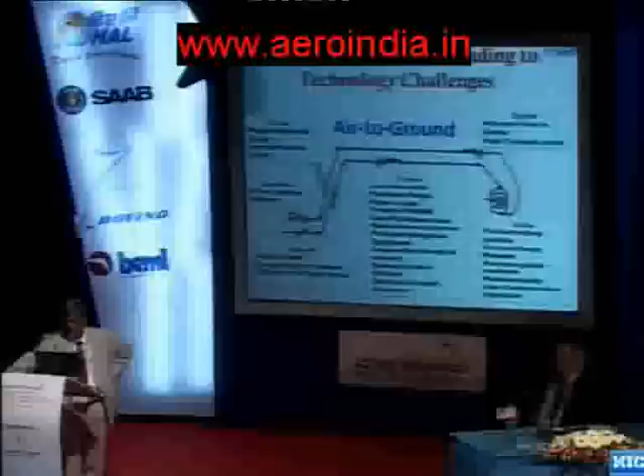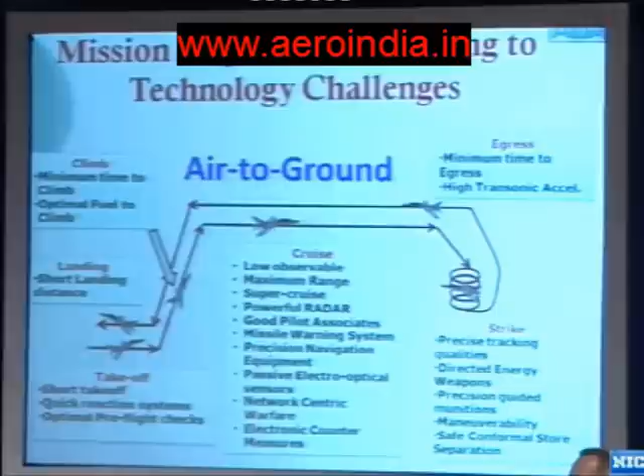The quick reaction system is an evolving requirement. Every time we are told to see that the aircraft can get airborne after a command within the shortest time, that demands technologies. And the user would like to have pre-flight checks done - absolutely nothing undetected, nothing spurious told. So that's how the demand comes to the designer.

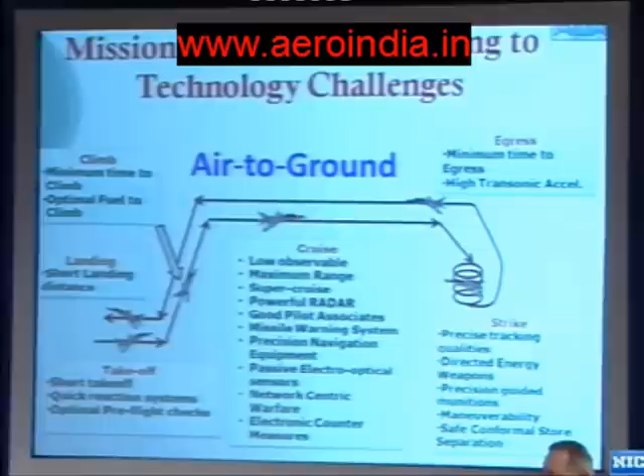Then the next phase is the climb. The requirements could be a minimum time to climb to a particular altitude, or sometimes optimal fuel to climb there. All these things lead into design and technology challenges.

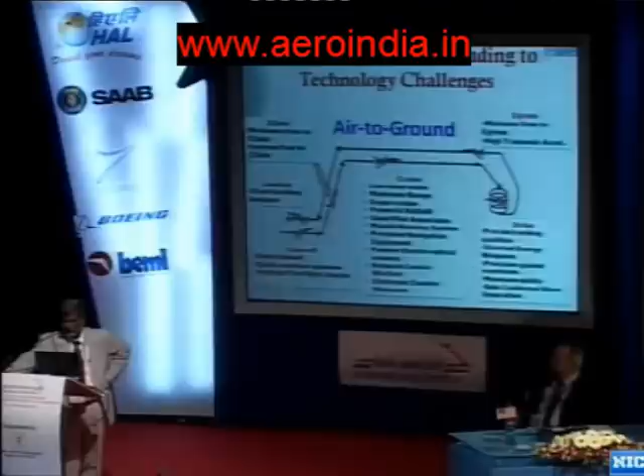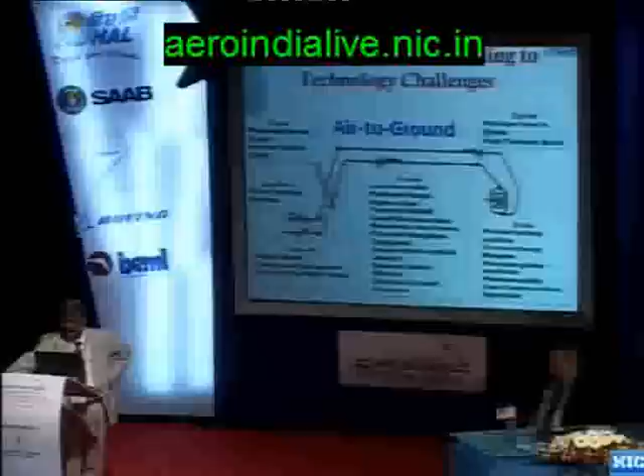Then comes the mission segment - cruise, in the case of a strike aircraft. Each of these bullets is really a challenge to the designer, and this is where continuous evolution of future technologies is going on. Low observability, maximization of range, and super cruise - flying the aircraft at supersonic speeds without the afterburner on - is a requirement from the consideration of low observability and mission performance.

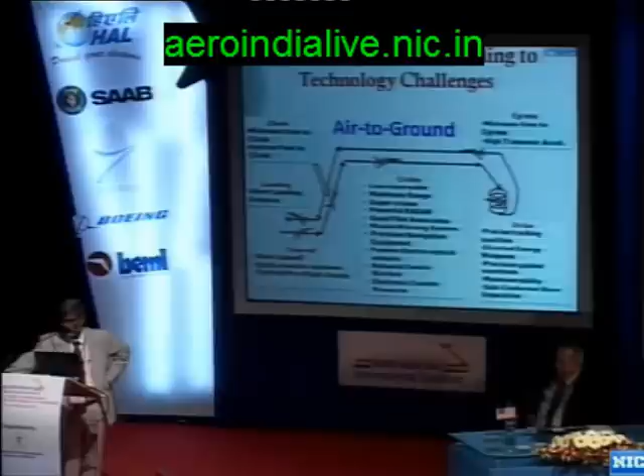And a powerful radar - maybe AESA or future versions with different apertures all around the aircraft, still getting the signal. A good pilot associate, related to artificial intelligence, where the pilot's workload is reduced. Missile warning systems, precision navigation, and so on - the list goes on. I won't get into the details, but I'm just indicating how these demands come to the designer to design the aircraft with all these things.

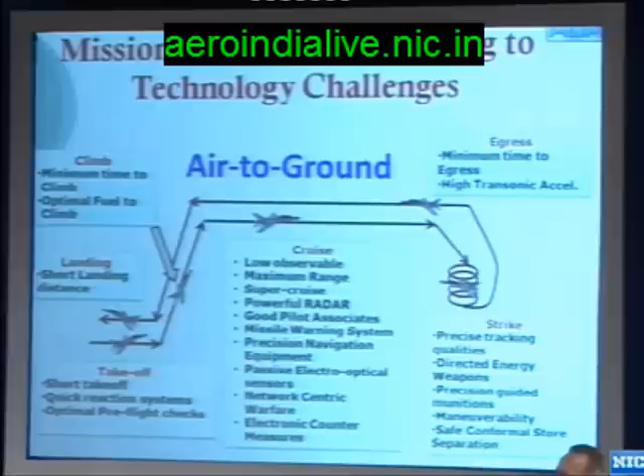Unfortunately, down the line, we'll see all of these are not coaxial - they are sometimes antagonistic and lead to conflicts in design. That's where the design challenge comes.

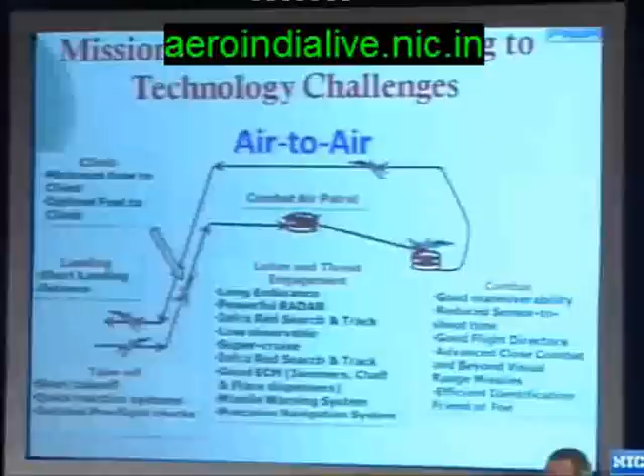Once a threat is detected, what kind of algorithms are to be used on board the aircraft so that a differential game logic is employed and our aircraft gets a gain over the adversary aircraft in terms of positioning for firing the missiles. And of course, the other things which I've indicated, efficient identification, etc.

This is how the designer first breaks up the segments, arrives at various user demands. Now, that would start demanding from the designer what he has to do. I forgot about the next very important one.

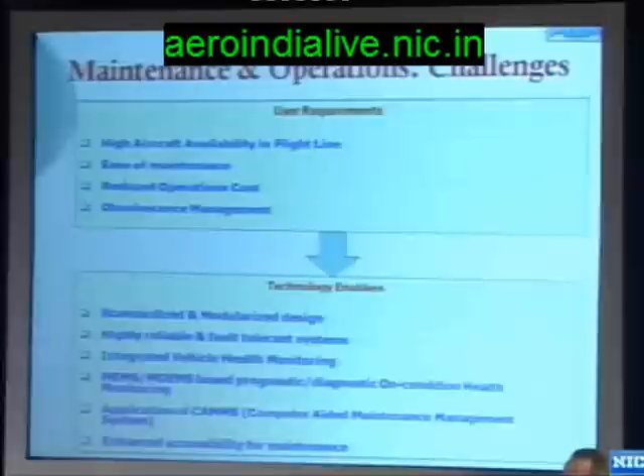Along with the missions which we have indicated, the user would also impose the stringent requirements of maintenance and operation, which is very, very important in terms of the overall life cycle cost of an aircraft. This plays a very significant role, and these requirements are given here in terms of high availability, ease of maintenance, and reduced operational cost, and so on and so forth.

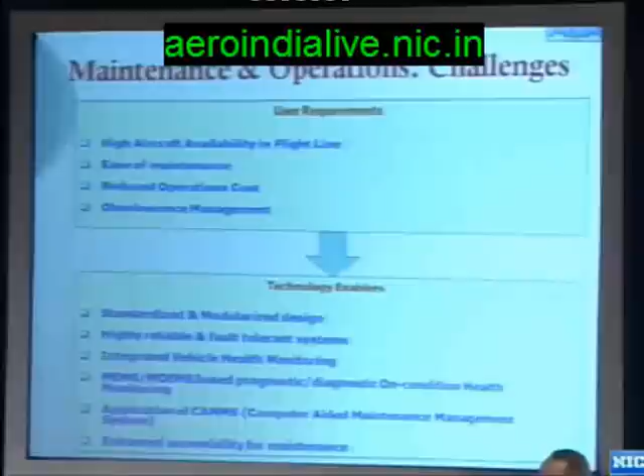And what technologies are demanded to achieve that are given in the bottom block, in terms of standardization and newer techniques of integrated vehicle health monitoring and MEMS and MOEMS based prognostic and diagnostic systems, where a good amount of research is going on and many people in the country are also working on that.

And down the line comes the applications that have to be developed for ease of maintenance, which are computer based. These are all the things which are required from the maintenance and operation requirements. So start breaking down and getting a little more deep into the details.

A pre-flight built-in test, that's what I said. It sounds simple, but it is a complex job for all the system designers. You would find out a complex system with almost, I think, say 15 to 20 major subsystems on the aircraft.

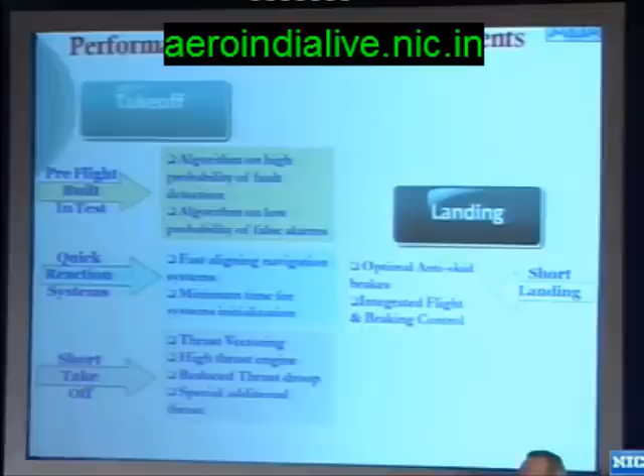He has to find out algorithms which would detect even the minutest fault on this. That's the highest probability of detection, and never throw surprises in terms of false alarms. It's a continuously evolving technology so that we clear the aircraft with high probability of detection and low probability of false alarms. Other things which aid the takeoff phase of the mission are the alignment times and system initialization.

There's a continuous requirement of alignment with a shorter duration with higher accuracy and minimum time to be used for that. The short takeoff distance, we always look for shortened takeoff distance.

That's where we get into the technology of thrust vectoring and high thrust engines and the techniques of reducing the thrust droop, which normally occurs in the initial phase of the engine, and some special technologies to see that for the phase of takeoff you get a special feature so that additional thrust is generated.

And in terms of landing, the demand is on optimal anti-skid brakes so that the landing distance is reduced to as low as possible.

And the new challenge that we are seeing in the programs is integrated brake and flight control system. People who have worked on these areas know that there is a coupling between these two, and the technology is demanding to have an integrated approach for this design.

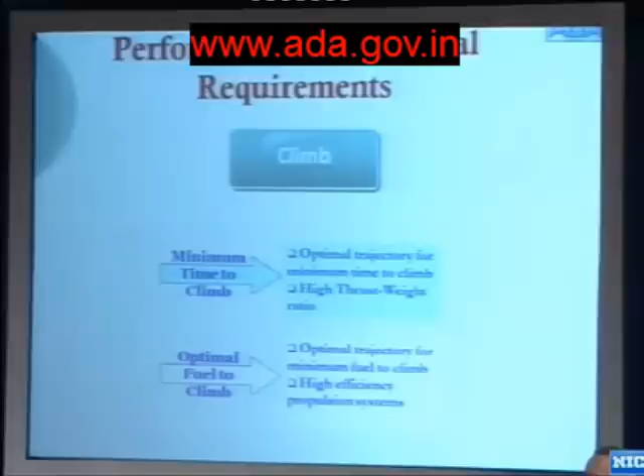And in the areas of climb related, of course, the basic aircraft design is one element, but also the new requirement is to generate onboard, in situ, optimal trajectories in terms of the time to climb or minimum fuel for climbing.

And again, for the low observability, the serpentine intake and exhaust - the design itself is a challenge, especially the serpentine intake, without losing what we call the pressure recovery.

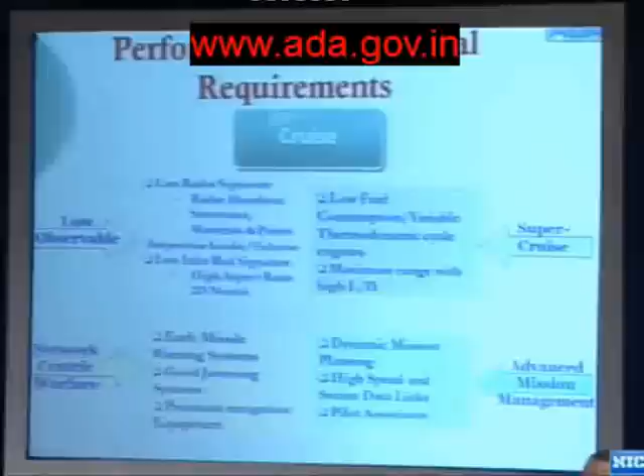Low infrared signature, because as we know that in the area of threat detection, it's not only in the area of radar, but in the area of infrared detection also, there are substantial improvements to detect the enemy threat, which only means that you should have an aircraft whose infrared signature is as low as possible. That again is a challenge in terms of the aircraft engine designers, especially on the nozzle side.

Then, of course, speakers earlier to me have already impressed upon the requirements of net-centric warfare. It's very, very important, and it's a technology that is continuously evolving.

We have to catch up with that also - you need a good system design for the aircraft and the surrounding systems which cooperate with the operative segment. The supercruise demands, as I already said, call for a complex engine design which would give as much thrust as possible at dry power itself, while still meeting what is required at max afterburner level, satisfying the mission requirements. This is a challenge, and the other one mentioned here is on advanced missions, mostly avionics-supported requirements.

When we come to combat mode, it's well known that super maneuverability is required - that is integrated flight and propulsion control, and of course advanced sensors and weapons are a requirement. There are continuously evolving challenges in this area which I have listed here. Some of the things coming up for fifth or sixth generation are directed energy weapons. I'm sure one day they will become part of the aircraft weapon system.

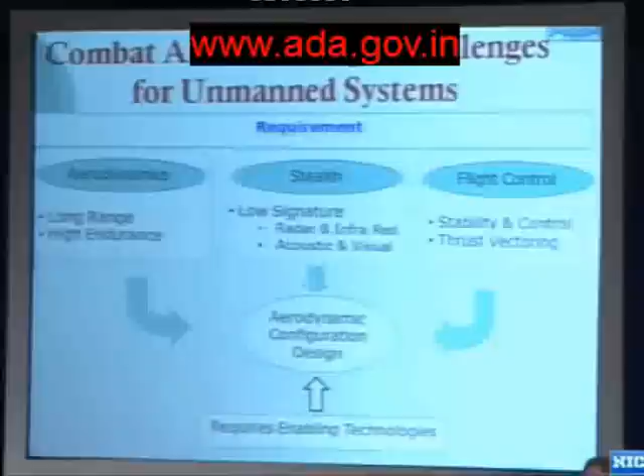So now comes the challenge to the designer - all those requirements pouring in with various demands. For example, take an unmanned aircraft: it has demands on aerodynamics, stealth, and flight control. If you look at all of them, the solution is not going to be simple. It's going to be complex because the requirements from each of them contradict each other.

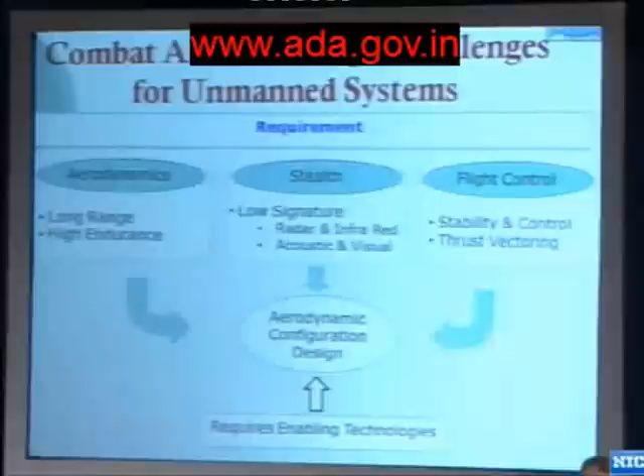That is where we get into enabling technology - multidisciplinary optimization is a new technology which is evolving to support the design of these kinds of conflicting requirements from various sub-disciplines of the aircraft. This is an emerging area of technology. A lot of progress has been done even within the country in evolving these tools. It's not simply buying an MDO package - you have to characterize it specific to the application you're working on. This is one area where technologies are evolving.

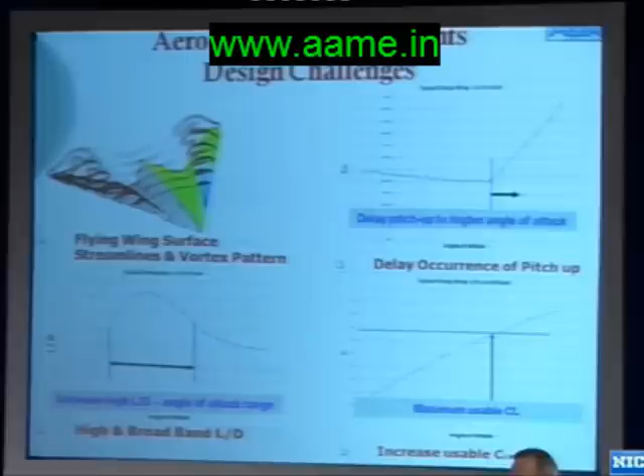Just to take one simple example - if one takes the design of an unmanned aircraft, the left top indicates how the pressure distribution looks if nothing is done on a flying wing. Then the design challenges come: one is they would like a broad band of angle of attack where the L by D is adequate for mission fulfillment. Similarly, they would like to shift the pitch-up point to the right - that's again a complicated aerodynamic design, and of course there's the maximum CL.

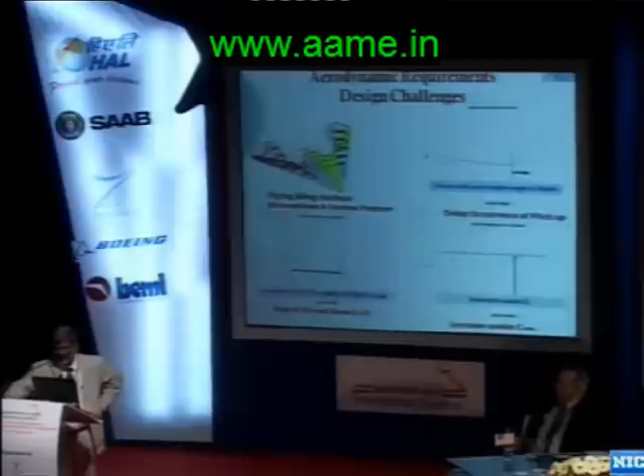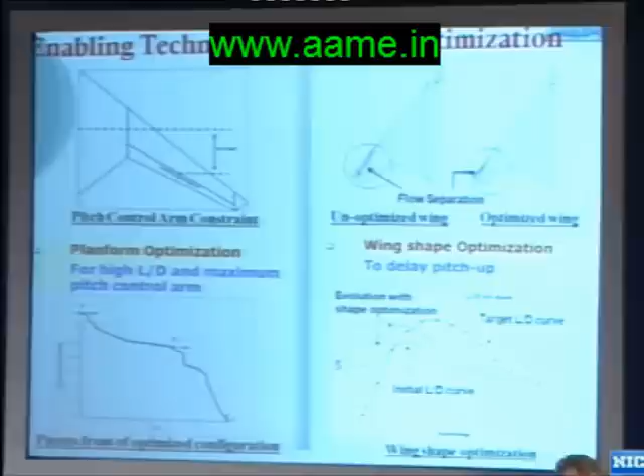What I'm trying to say is every stage leads to complex contradictions in the design, and new design methods, design tools, and experimentation are required to accomplish such design objectives. This is one more example where the demand for pitch control arm is demanded. When compared with the large L by D requirement, this clashes with that, and one has to go for optimal design so both converge to a satisfactory solution.

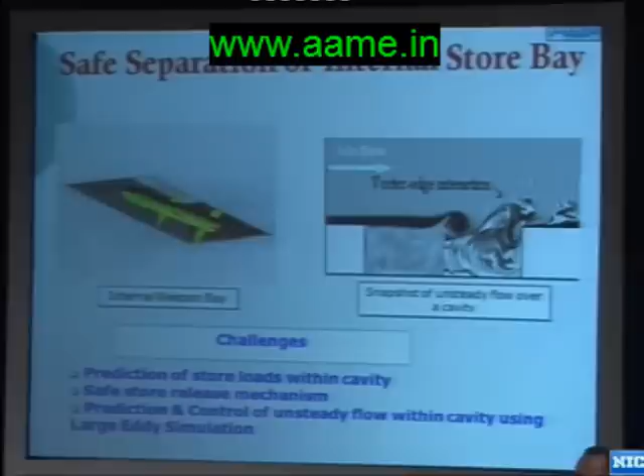Another technology problem scientists point to: for low observability, conformal carriage of weapons is very important, but once you have that arrangement, when the weapons have to be released, the flow analysis at that condition is quite complex. A lot of activity has been initiated in the country to understand the flow patterns when the bay is opened and weapons are about to be released, especially if it is supersonic.

Stealth, as we've indicated, is a requirement, but it decomposes into many other technology areas - aerodynamic shaping, shown top right, where the cross-section of the aircraft at various stations has to be iterated to get the best shape for minimum radar cross-section; the intakes; internal weapons, already discussed; and advanced materials and paints required for radar cross-section reduction. For infrared detection or thermal signatures, work is needed on the engine nozzle area. There are also requirements that engine exhaust visibility be brought down as much as possible so the visible signature is also reduced - another challenge for designing a low observable aircraft.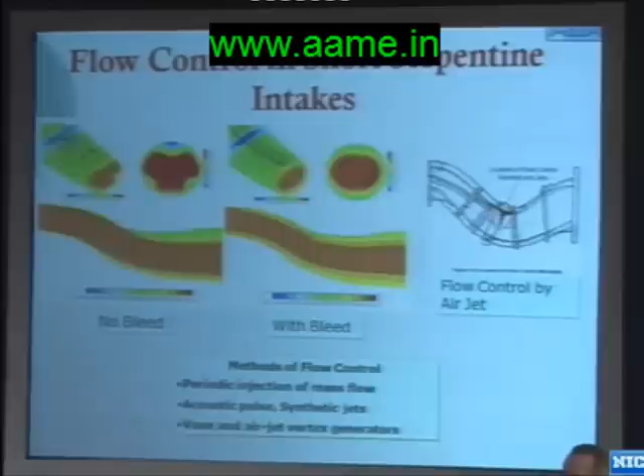So further detail, one gets into the design of, let us say, intake. It itself is a very complex subject. Quite a few academic institutions are working on that. The flow does break when the curvature changes, and there should be new methods and innovative techniques of flow control so that flow separation is almost eliminated and pressure recovery is high. You want a serpentine intake for RCS reduction, but without these controls, it would yield poor pressure recovery and engine performance would go down. So innovations are required in this area, and we have to have technologies to overcome this problem.

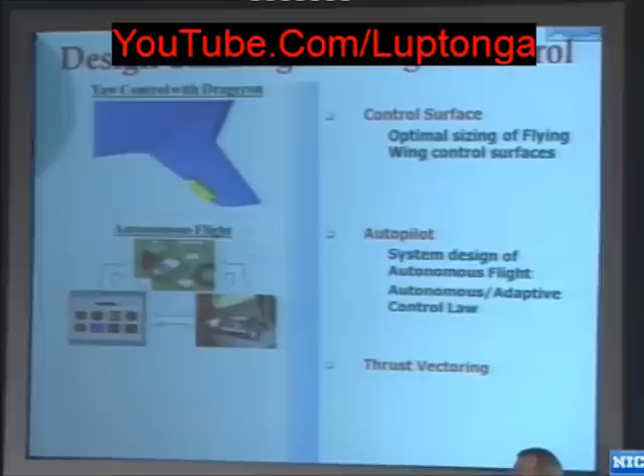Another area is designing the planform of the aircraft wing, and that's how the challenges arise, especially when we talk about flying wings. We will see a new technology altogether, which at least in India we have not seen, controlling with dragerons. The flow over that particular place is a complex thing, and the analysis tools and experimental tools have to be advanced to overcome that problem.

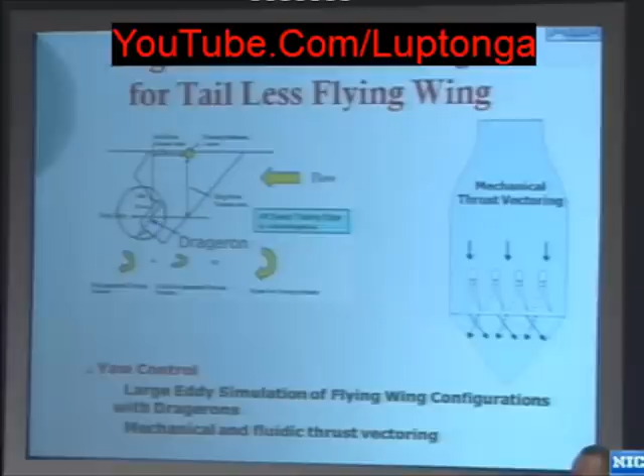So we do talk about thrust vectoring, but it's not as simple. One solution is thrust vectoring by vanes deflecting the flow. Of course, the standard swiveling of the engine is all right, but that's becoming outdated. The new technologies are the swiveling of the vanes inside, and yet another new technique is what we call fluidic thrust vectoring. This is what people are working on, and we're also trying to exploit this so that we get swift thrust vectoring, which again is required for the best maneuvers and things like takeoff, which I mentioned in the beginning.

I just went into some depth to show the challenges in one area, but if you take any other bullet point and go further down, it really leads to technologies that we all have to work on in the future.

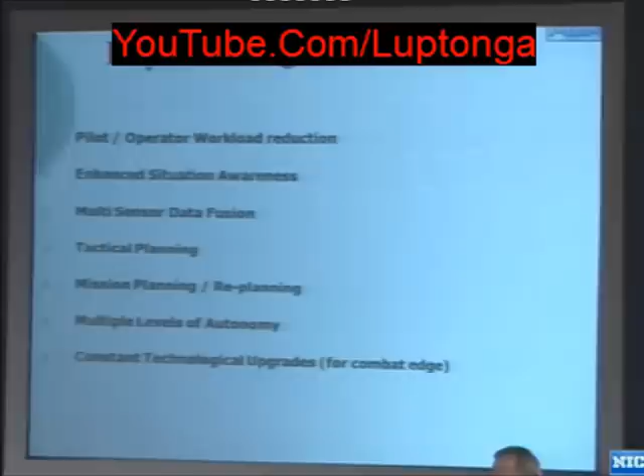In terms of avionics, we have just put in bullet points the demands which come to the avionics designer to meet the requirements that I projected earlier in the mission segments.

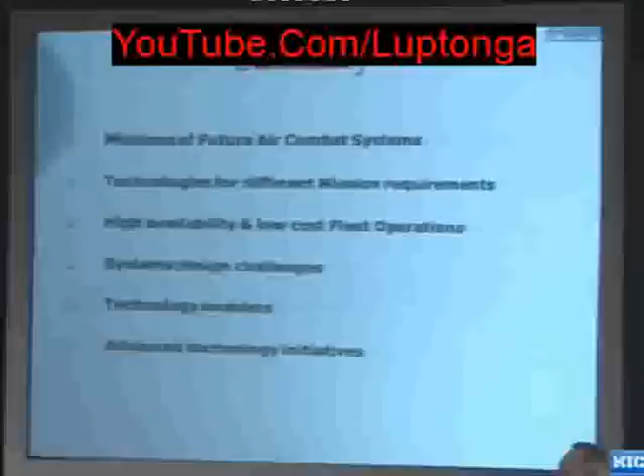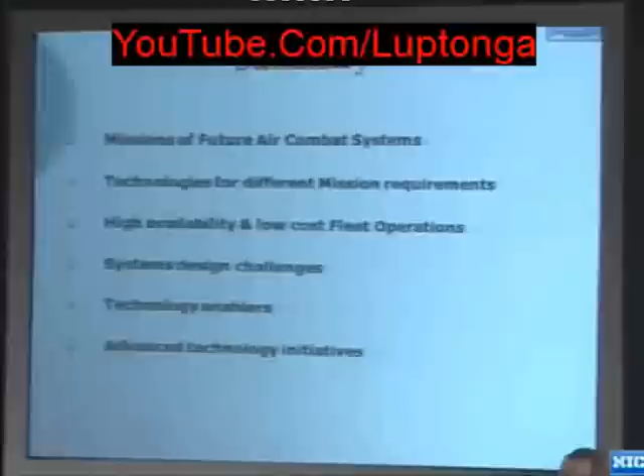So, whatever time I found, I used it to tell this forum how, after the higher layers of threat analysis, mission analysis, and design strategies are evolved, it comes down to the designers, and a great amount of technology evolution has to take place. I've gone into a little more detail in one or two areas, but each area is a complex design innovation by itself which is demanding. These are the things I thought I'd share with you before I conclude. Thank you.